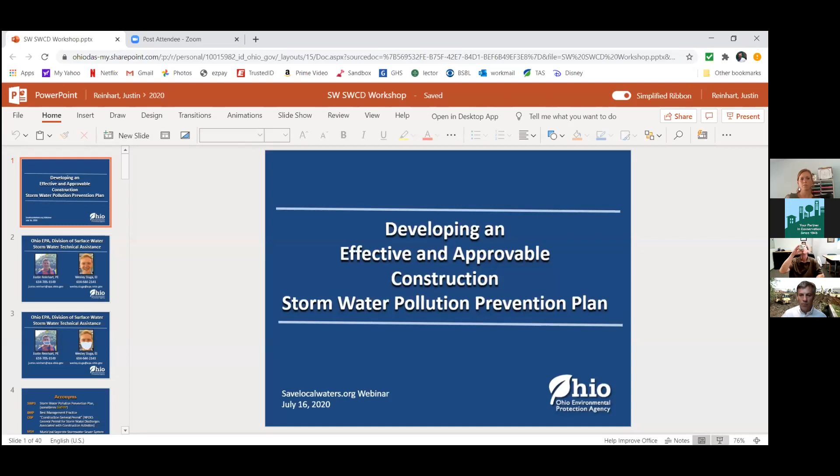Well, thank you again to Save Local Waters for hosting us today. It's unfortunate that we weren't able to proceed with the in-person workshop. I very much enjoy seeing and talking with folks in person, and especially on a regional basis, but I suppose the advantage here is that today we get to offer this statewide, and I see we had many partners register across the state. So thank you for accommodating the current times, and we'll see how this goes.

Also for setting the bar low, as our goal today will be to not have any glitches. Thank you, John. I think that gets Wes and I off to a good start. Anything we do and say from here on out is hopefully just icing on the cake. This is the first one I've done of these webinars since COVID-19, so hopefully it does go well.

But if there's questions or problems, please let me know. John, I believe you mentioned also that this was being recorded and may be available in the future. So here's Wes and I and our contact information, and you probably will more recognize us as this, or at least the foreseeable future, as we are currently working telecommuting as many of you are. So welcome from my basement.

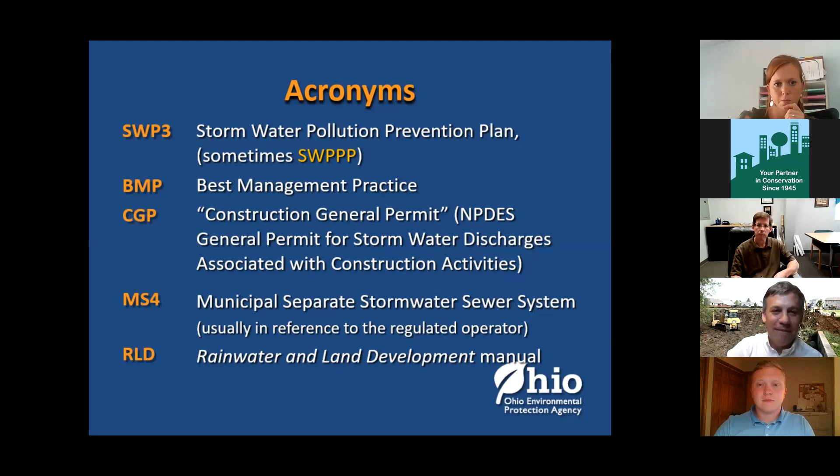Okay, so to start us off, thinking about a SWPPP and developing a SWPPP, and what is an effective SWPPP - and ultimately approvable is just the same as effective - I wanted to start by taking a step back and looking at how are we going to talk about that in an hour, hour and a half, more or less, in a simple webinar, when we have really a SWPPP document that's meant to be a very tailored, custom-built tool that is site specific for the project, and yet at the same time is something that is really incredibly diverse.

Just a few statistics I pulled out the other day, so these are current: we have almost 6,000 actively covered sites under the general permit, the construction general permit right now. Now, some of those may need to be terminated, but that gives you an idea of the amount of work. Much of that is covered under 623 MS4s in the state of Ohio, now pared down to just under 300 total permits, as many of those local MS4s are relatively small and grouped together.

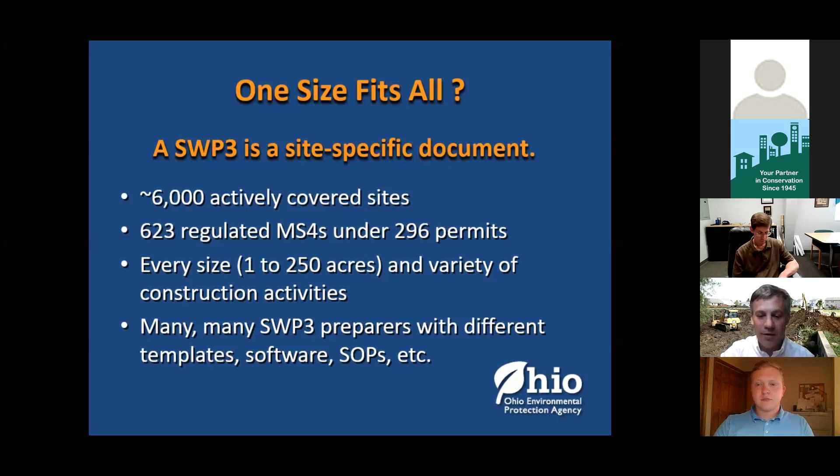So I guess that's a long-winded way of saying it's probably impossible for Wes and I to very simply, in an hour and a half, explain exactly what goes into a SWPPP when there could be so many different things, but we'll give our best shot.

So from the broad, I'm going to narrow way down in, and rather than go through line by line all the different requirements listed out in 70-something pages of the construction general permit, I really want to focus on one quote, one direct quote, one line of text, and that is, as a reference here, page 11: the SWPPP shall describe and ensure the implementation of best management practices.

Now that struck me as being awfully heavy when I started to think about 'ensure the implementation of best management practices.' It's quite a responsibility that we're stating a SWPPP is to do, and I try to come up with an analogy to this. Maybe this isn't relevant to some of the audience, but I thought back to Joe Namath and Super Bowl III of all things, and that was the original guaranteed victory.

And it's like, whoa, I mean, can we do that? Are we asking that we guarantee victory through a SWPPP? And I don't know if that's necessarily the case, that we're saying there shall not be problems.

But ultimately what we're saying, I think, is the SWPPP is a complete game plan, a war plan. Certainly Broadway Joe wouldn't have said that famous guarantee if he hadn't been confident that they'd addressed all the different elements of the game, and really felt bold and maybe even knew something that others didn't about their game plan. And really, that's what the SWPPP is.

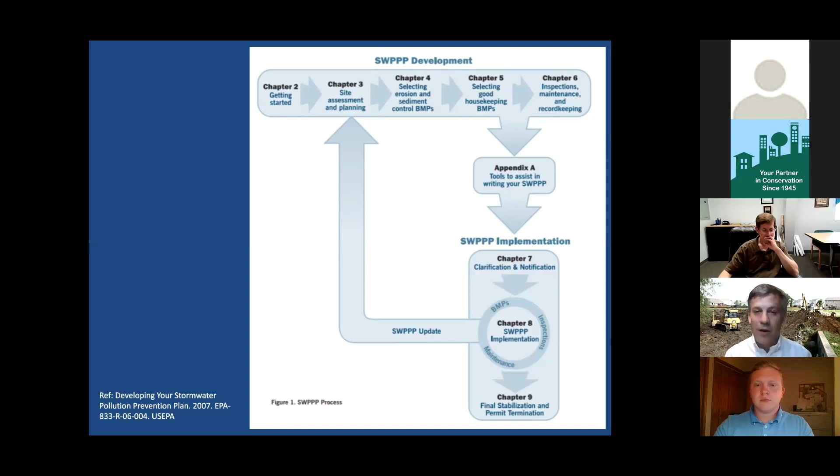It's maintained on site throughout the course of construction. It's modified, it's adjusted and adapted as such. And we recognize that those things are going to happen. Everything isn't completely predictable.

To an extent, the reality is that on most projects, from my point of view and experience, that process really is somewhat short-circuited. There's very little processing through the entire development process. It's hard to avoid, in engaging, implementing, and finalizing a SWPPP. Once the SWPPP is complete, construction starts. That update scenario tends to just revert back right into the implementation phase, and it's understood that it happens as part of the nature of projects today - that essentially the original designers are often not necessarily brought in once permits are obtained, plans are signed off on, and construction is green-lighted.

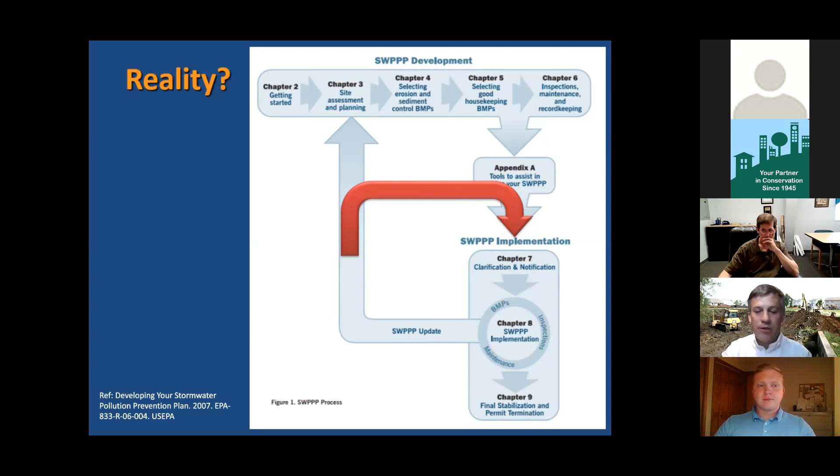Again, not to cast blame or point fingers, because these things happen, but it just highlights the process that really isn't much of a process - that we really have to have things done well and done right the first time, because these scenarios happen. Not to say that we could or should have foreseen this, but at least provide mechanisms to hopefully better address, prevent, and maybe even at times correct those types of problems.

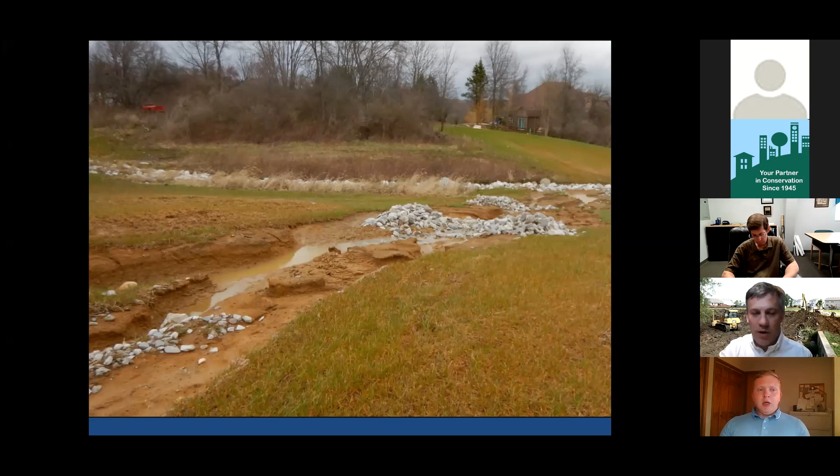So, to keep this first bit a little big picture, our mindset going into the development of the permit is oftentimes, and justifiably so, looking at the permit and saying: what does the SWPPP, or what does the permit require of the SWPPP? What am I required to have done? What is the minimum, and what does it say to do? And I'll do that, which is okay.

That certainly gets us what is needed, but I think to really be an effective and ultimately approvable SWPPP, we need to step back from that and look at our site and the conditions that could occur throughout that process, and determine what are the elements needed to prevent those problems or fix them if they arise. I know it's hard to do this without being too preachy, but it's important to recognize that just working through what you have to do probably doesn't get us ultimately to where we want to be.

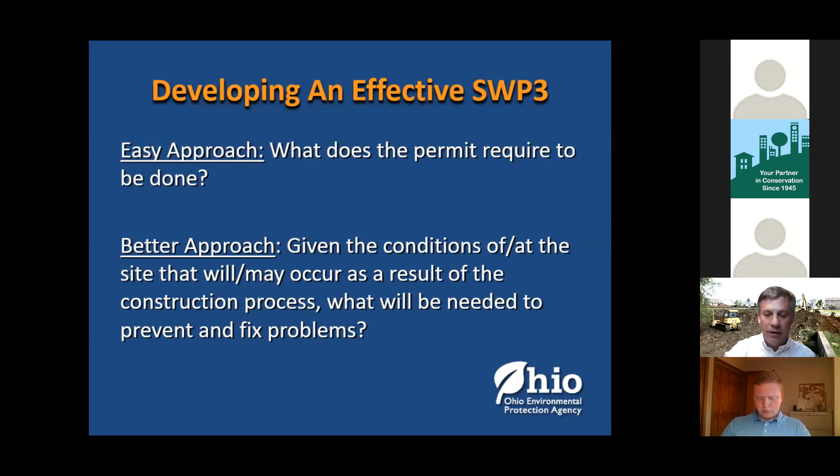Another element that is often challenging for all of us is that, especially as an engineer, our focus tends to be on ultimately the bread and butter - the permanent infrastructure that's going in. That's the fun stuff - whether your specialty is in piping, utilities, pavement, structures, grading, balances, and all the other elements of developing a project, or something more elaborate like airport construction or wastewater treatment plant construction.

The focus is always on the permanent infrastructure and the end result, whereas the SWPPP is such a different animal from the construction plans. It's really focused on the construction process and providing tools - not necessarily permanent, but temporary and usable tools - to guide the operators through that construction process and ultimately get to that permanent infrastructure. A lot of times what really gets weird is when we start to mesh those two things into one document. It's not that that's not doable.

I think it's just important as we go into it to make sure our mindset is that the SWPPP components are really a process-oriented element, whereas much of the rest of our work is really focused on that permanent infrastructure.

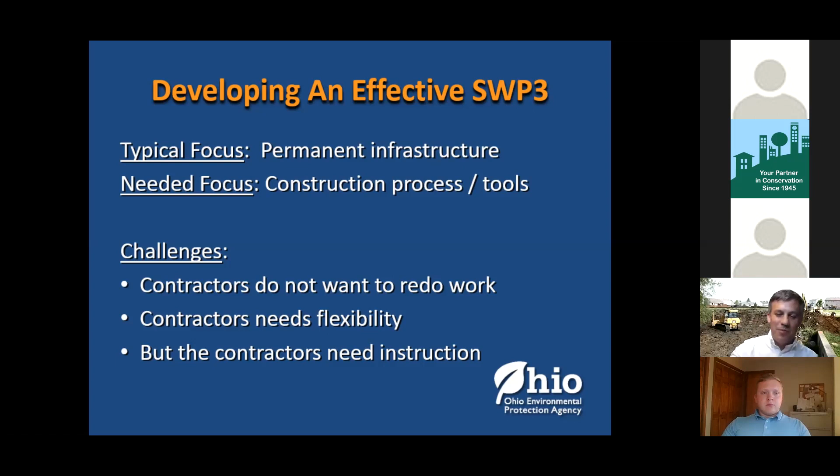But that doesn't necessarily excuse us from providing instruction, because ultimately the contractors and operators are looking for instruction on how to do the things that they need to do. So how do we wrap all of that into this strange, interesting animal of a SWPPP?

Ultimately, whatever we're doing as far as the project goes, it's a simple process, really, and I don't want to belittle it, but I also don't want to belabor the details. It's looking at the site, looking at the project from beginning to end, and assessing the project vulnerabilities from a pollutant standpoint, heavily focused on the sediment loading side of things. Some of those common vulnerabilities I've listed here, and then applying the proper BMPs.

So those BMPs are in some cases required, very specifically, through regulatory documents including the construction general permit. Sometimes the site might necessitate things be done a certain way. There's also an element of BMPs that are more like a tool box that can be employed as needed or as conditions arise. That's an important element of a SWPPP, I believe.

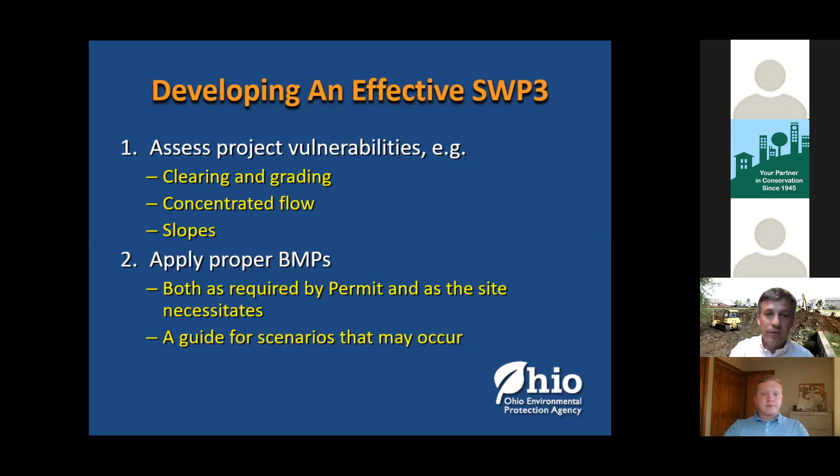So if I take those two steps and really start with looking at the vulnerabilities I mentioned - I was reviewing a study, probably dated, I don't remember the date, but probably 10 or 15 years old now, that looked at a small site, and the numbers are astronomical. The amount of TSS, or total suspended solids, in runoff over a small construction site, based on event mean concentration, were 150 times what they were before and after construction during active construction. I don't know, there's probably a lot of details, and that may just be one study, but it clearly shows an astronomical rise in sediment export.

And really the demarcating factor there is vegetation - the clearing and establishment of vegetation - as far as what is construction and what is not construction. Those are our bookends. So it's important to recognize that we need to think of these controls right from the get-go.

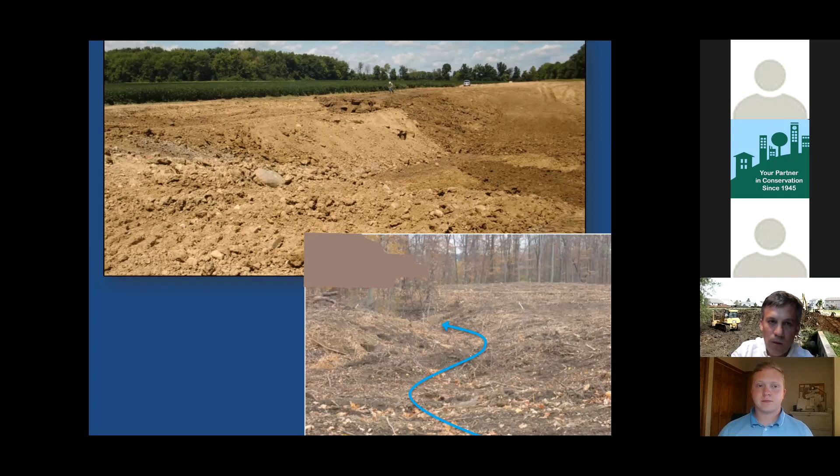Another high vulnerability spot: concentrated flow. This is one of the reasons a lot of the requirements in the permit are, to me, a forced thought process - the contours requirement for existing and proposed contours, especially the existing. It's useful to the designers in looking at how the site is eventually going to be laid out, and the cuts and fills that are going to be necessary to make the most conducive layout for drainage and other reasons.

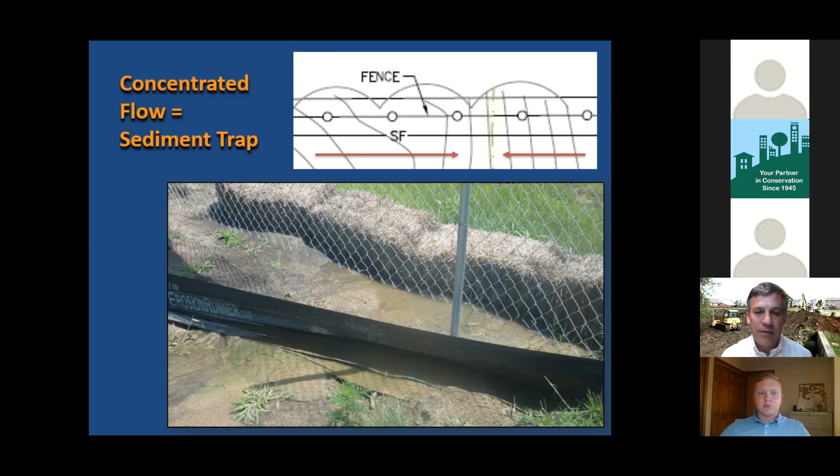Speaking of that, concentrated flow areas are again a high vulnerability place where we're going to see probably a lot of erosive soil movement, as in this channel that's constructed here, and it's very difficult at this point to remedy. We've lost topsoil for seeding, and we've got gullies now that will need to be either filled, and now we're moving water on fill.

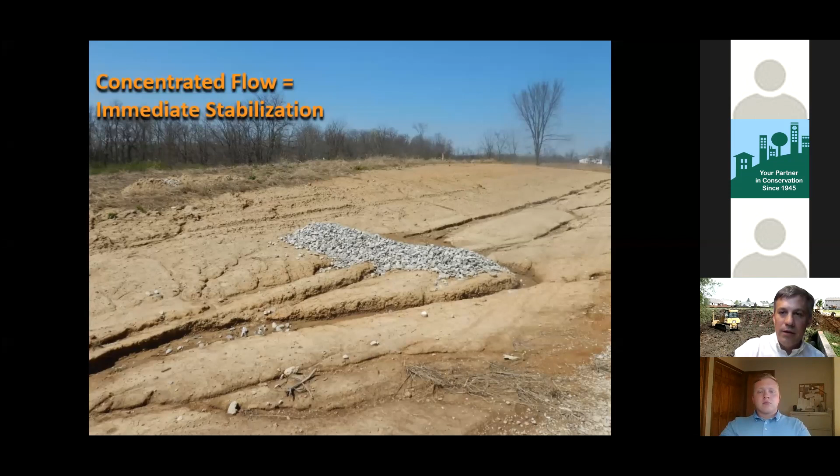We've got a little bit better structure here in place and a rock check to attempt to now slow or stop that erosive gullying, but at this point it's probably too little too late. Maybe a scenario where we would have had immediate stabilization, mulching, seeding, matting as necessary, rock checks as necessary, would probably have done a real good job at preventing that gullying from happening in the first place.

So those are areas of high vulnerability where we want to probably focus a lot of attention with concentrated flow areas, whether they're existing or created areas.

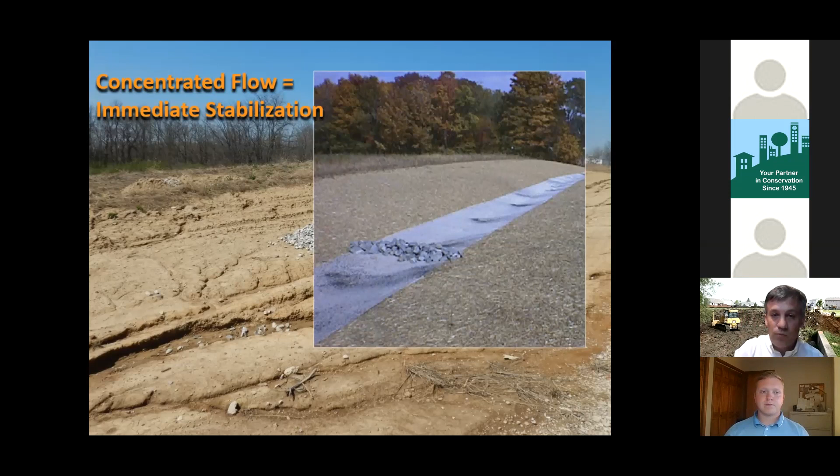Oftentimes, if we haven't specified something as a necessity to be placed or an option to be placed, these are the type of tools that we're going to have to pull out of thin air, or a contractor may pull out of thin air when he's told to by my counterparts more in the regulatory elements to fix something or change something, and the toolbox is bare. So we don't want to leave them with the toolbox being bare.

I mean, some of these scenarios aren't foreseeable, but again, we want to make sure that we address all the possible situations with the proper BMPs.

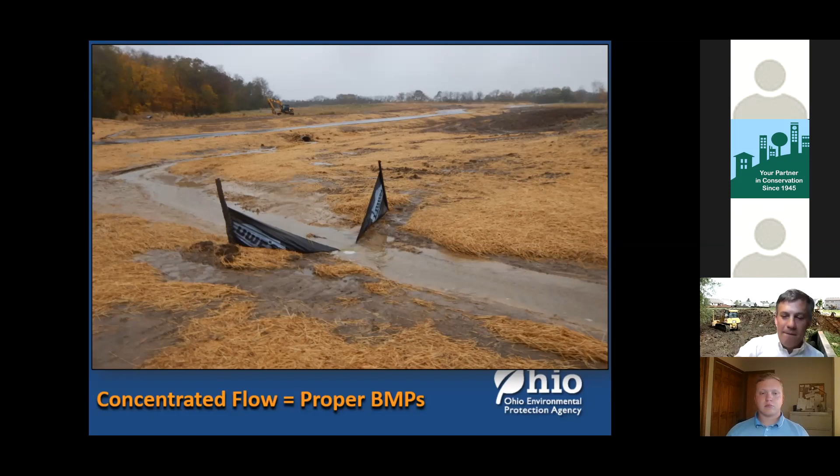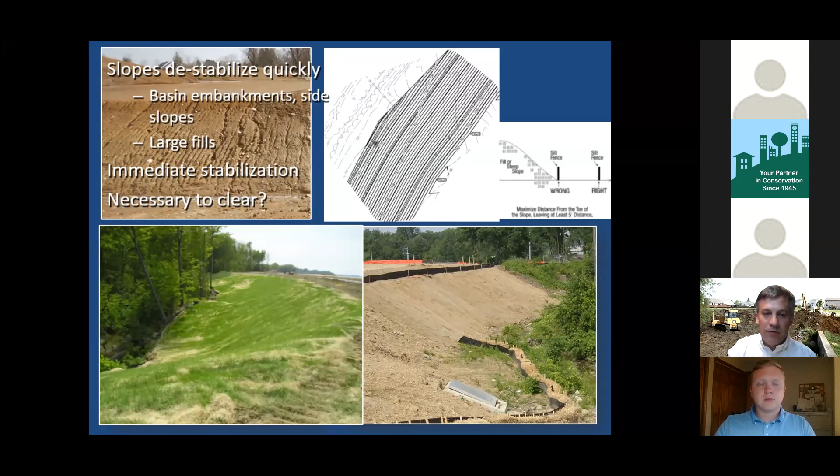And I like the picture on top. I showed you half of it earlier, but you can see now the other half.

So again, anecdotally showing that evidence of timing is really of the essence when it comes to problem solving and prevention. Timing seasonally is oftentimes hard to predict, and somewhat contrary to thought, a lot of the erosion ends up occurring more during the summer season when things are dry, like in that above picture. Yet you have severe gullying going on because you have periods of large, intense thunderstorms—lots of water coming down hard, very impactful, and lots at once on now relatively disturbed soils.

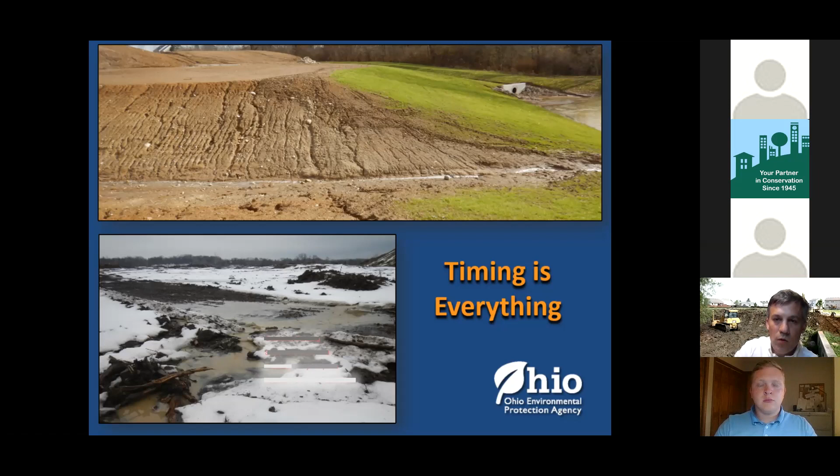And with that, the timing, I think, leads into the schedule. I kind of lied when I said there'd only be one quote or excerpt from the permit. As I went through this, I found it might be worth pulling up the exact wording there on the SWPPP list as far as our schedule goes.

But it requests an implementation schedule be included with the SWPPP, which describes the sequence of the construction operations and the implementation of the BMPs that go along with those.

And that's easy to do, and I think most people preparing a SWPPP are doing just that, in various forms putting together a construction schedule to the best of their abilities, understanding that many items here are either out of the SWPPP designer's control or unknown at the time the SWPPP is being developed. That's certainly understandable.

But it's also a manageable expectation, in that we have to also not get too caught up in the concept of construction schedules. I used to do a lot of construction schedules early in my career working for a contractor, submitting those with bid packages, and I've seen some immensely impressive schedules lining the walls of construction trailers like wallpaper.

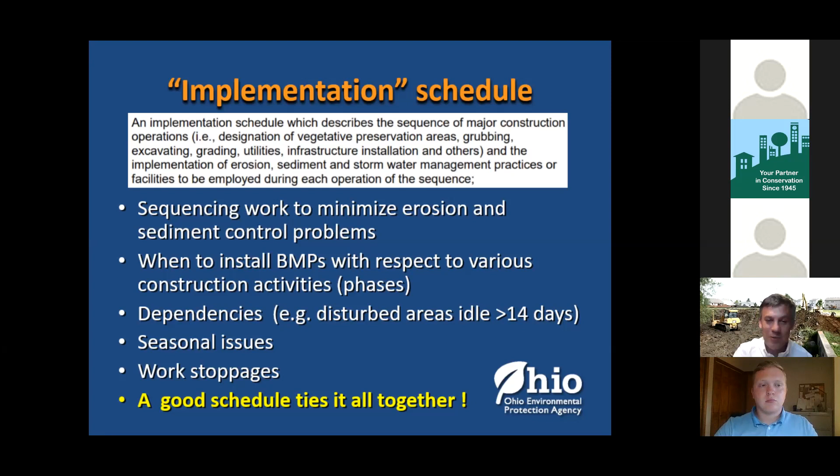So I kind of took a stab at looking at an implementation schedule—not that you should use this as an example, or think 'oh, Justin said do this, so I'm going to do it exactly this way,' but more so to get the wheels turning on things. And of course, the first thing we said is the schedule needs to really look at different operations and the sequence of those, realizing that at this point in time we may not be able to establish a specific time frame, but let's at least try to categorize those operations.

What order are they going to be in? They're generally pretty basic, and lay out a little bit of expectations of what are reasonable time frames, so that we can start to see how this whole thing is going to piece together. This isn't as important from a construction standpoint as it is for building the SWPPP—what are these pieces and where are they going to go? Really, almost the first step in building the SWPPP is getting us thinking sequentially and chronologically.

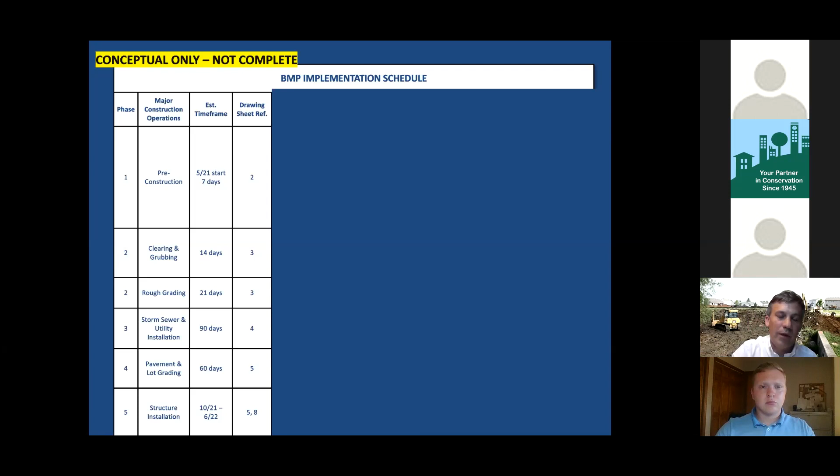I added this in there as a sort of cross-reference, like how do we then build our SWPPP according to this sequence or chronology? Do we tie the actual physical components of the work shown mostly in drawings, sometimes our specifications, to that exact sequence? Do we have that lined up? Or do we just have one pre and post construction type of plan set up, which is understandable, because that's probably from our permanency focus of what do I have now, what I might have at the end. But maybe we can work to bring in a more detailed chronology here, looking at these phases as they're probably going to occur throughout construction.

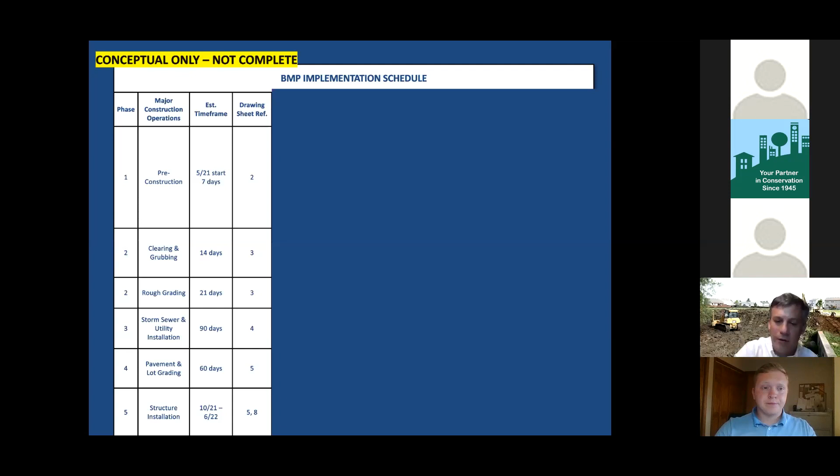And then lining up the plan, be it narrative, description of what to do, exactly when to do it, listing the BMPs that are going to be used. The schedule is only going to provide us the list and the timing, and the location will be indicated on our plans, but we can break that down and even provide a contingency scenario. These are other things that might be necessary throughout this phase that may or may not be included in the plans, but are part of that whole toolbox provided via the SWPPP.

So again, I didn't get this completed in time, but I thought it was enough and worth showing at least as a concept. So that's hence my little caveat up there.

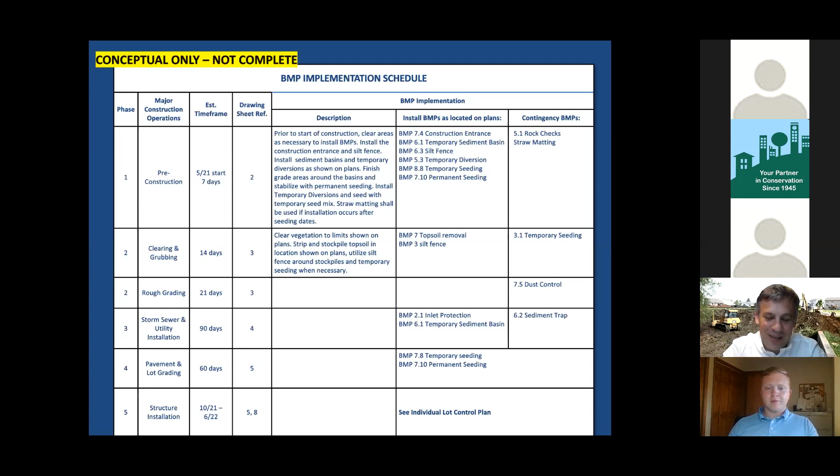Going back to tying that to the drawing, so now we've got drawings that are really thinking sequentially and chronologically. For pre-construction, most people are doing existing conditions, but let's take that to what's existing, what's beyond existing, to what's construction day 0, day 1, when we're implementing those initial practices, emphasizing that those go in before the rest of the work is done.

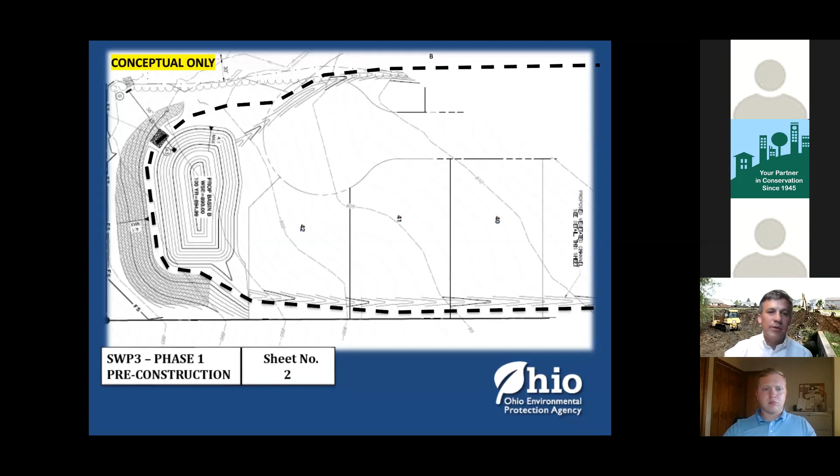So I've got my basin shown in here, and diversions to that basin, and some silt fence down to the left, and maybe a few items like the dotted line I added in as a drainage area to help SWPPP reviewers understand what's being collected in that particular basin and identify how that matches up with the other parts of the SWPPP.

I've got my table showing all the different various requirements to the basin and checking that with various tools provided to show the reviewer that all of this lines up and matches per the design requirements and per my intended outcomes here.

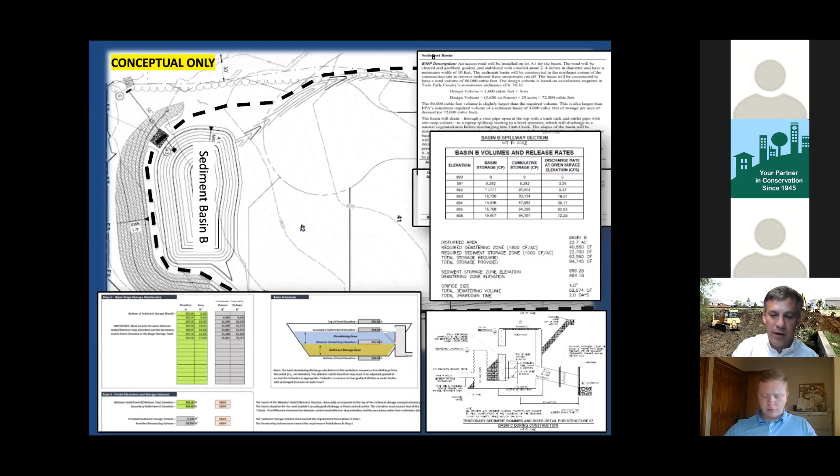But then I look beyond that and say, okay, especially when I start thinking timing wise, I've got the basin in, and most everyone is pretty up to speed on basins. But let's look at the next steps. When the basin's constructed, can I also then go ahead and seed those areas?

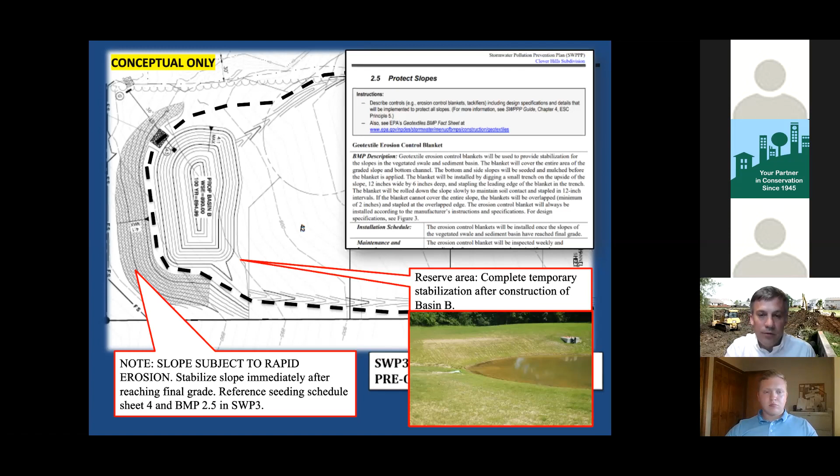I've got a slope created by an embankment constructed to the left. I've got an area where the whole basin is in reserve, so that work shouldn't need to be touched later through home construction. Can I get that whole area stabilized up front before a lot of the other work occurs? Those are things we can call out in a plan, noting, hey, this is a pretty vulnerable area, it's very important that we get this stabilized up front, and these are the tools, the BMPs, that we have to use to do that.

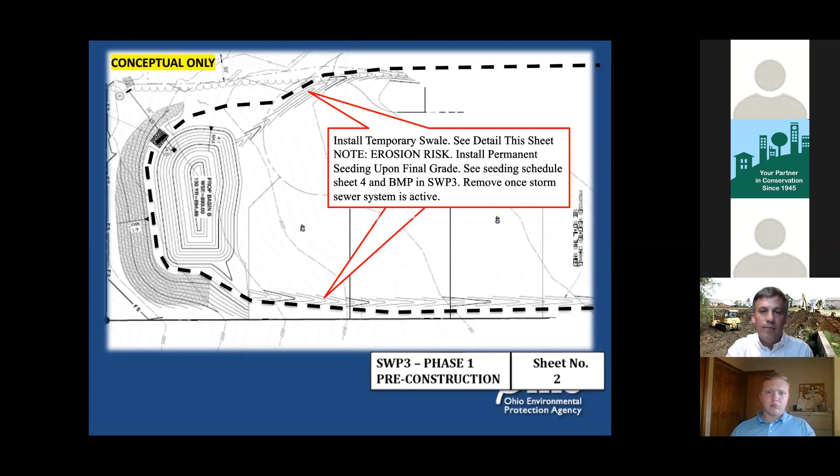Swales, again, show kind of a timing scenario, like how are these going to go in, when, are they going to be removed, when are they going to be removed throughout the process.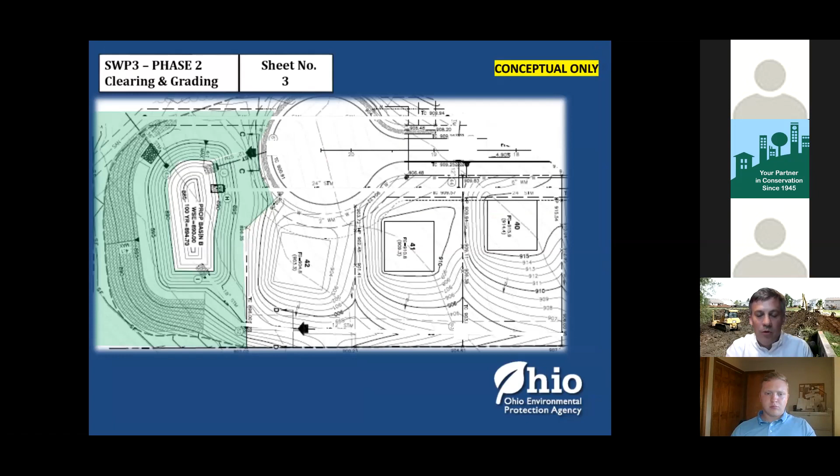I move to my next step. Now I've got really clearing and grading happening. I've got the rest of the site being removed and brush being removed, some mass grading probably starting. These are areas where now we can start to see water move differently. I've rough cut my roadway, and I've got a culvert down at the bottom of the hill. That roadway immediately turns into basically a riverbed and concentrated flow.

If I'm not careful and prepared, if my timing is not right, I might need to utilize additional tools to prevent problems from happening, like this sort of gully erosion that happened at the end of this culvert going down into the basin in a very similar scenario.

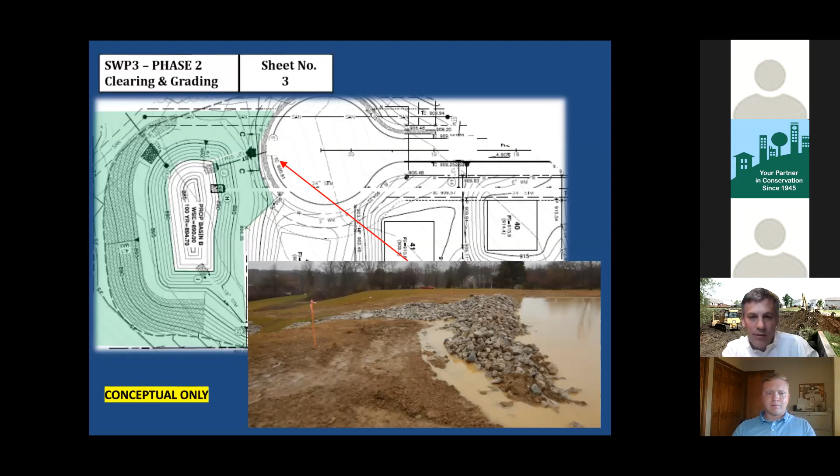Maybe I've got to put sediment traps. The grading is inadvertently acting as a sediment trap in this scenario. Maybe I utilize other tools during this phase where now I've got the help of having a sewer system direct water, but now I've got that water in runoff coming to me in a much different and much more concentrated manner.

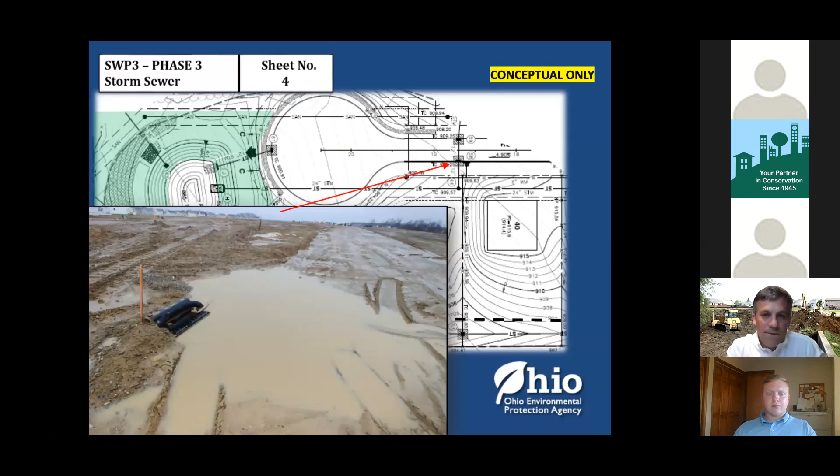Areas below here now, how do I make this work where I had a diversion going into storm sewer and a drainage swale? Making sure we're indicating in our plan how that's all going to fit. But most importantly, I think, is once I've got that area done, I've got the sewers in, I've got a swale in place, that's going to start moving water immediately.

Those areas shouldn't be subject to really probably any further construction on the actual lot site. So can we get those stabilized? Or if we're not, do we need to employ traps, again, like is almost inadvertently created here at this inlet?

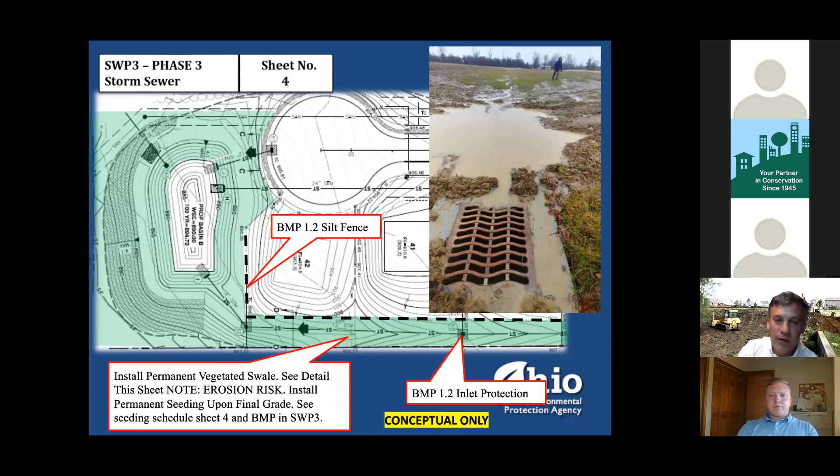Can we get those areas seeded, silt fence moved, so that we're really doing a sequencing and a phased type of project? And then I moved to eventually getting to the individual lots, and my individual lot plan is usually generalized, but I do want to call out that there may be scenarios where we need to make sure that we're very emphatic about certain things happening as individual lots get developed.

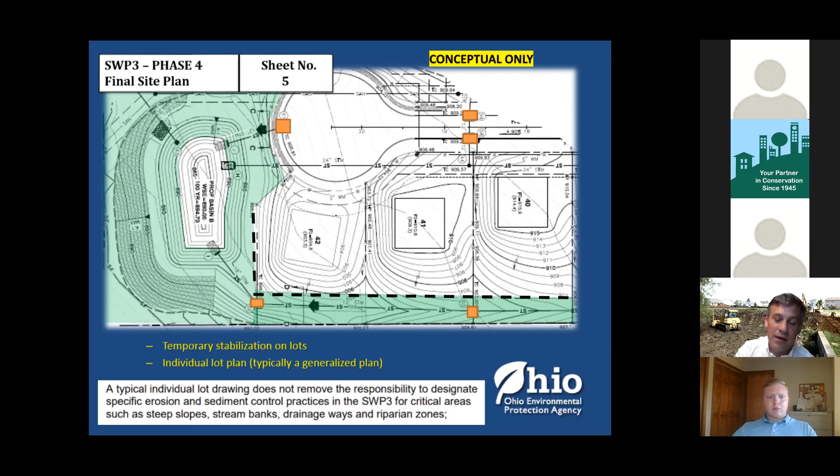And I'm using a residential site here as this example, but this clearly would apply to a lot of other sites, but I think hopefully you kind of see the concept I'm getting at here, which is this chronological thought of developing a SWP3 and then tying all these pieces together based on that chronology, not just in the plans, because the plans are very important. They're obviously what the contractors and operators are going to be focused on, but that they tie to the other components, the narratives and the design criteria and documentation.

And then long-term, what do I have going on? Temporary stabilization, we've got 2 different sites. The upper one, great, everything is done. It looks awesome. We're going into winter clearly, and we've got nothing. Can we emphasize that these areas are finished and can be stabilized?

And then on the bottom, you can maybe see a little bit of grass, and great, they actually did that. And, well, things happen. Of course, that became the roadway to all the next door neighbor home construction projects. And that happens, and we can't control that, but we can at least get a good start by not getting us to the upper situation and making sure that we get that temporary stabilization in.

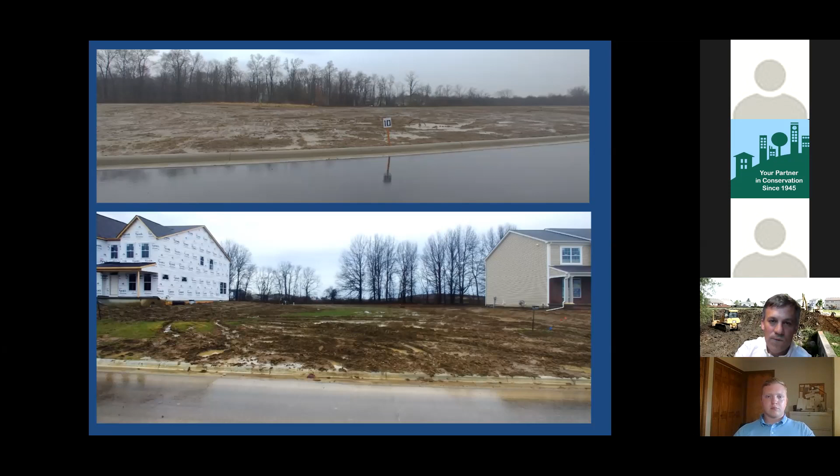Post-construction, that was a heavy load of sediment control. I think when we look at the post-construction elements of the SWP3, the most important thing I want to probably hone in on is how much focus is on the peak control elements and the movement of water, but really the post-construction design is so different in that we look at the water quality volume.

It is that 0.9 inches is looking at the annual average, the long-term and a complete volume of water. So you can see in those 2 charts, it's that whole knee of the curve discussion.

We're collecting the vast majority of water in that 0.9 inch event. It's not correlated to an actual event. It's simply a statistical value looking long-term at how are we getting 90% of that runoff collected so that we can treat it.

Because of that, a lot of misconceptions occur based on our traditional just quantity of water and outlet control thinking, that we really don't have a bigger is better scenario. If I move that 0.9 to 1 inch, I really don't collect much water, as you can see on the lower chart. So you really can't overcompensate, and it doesn't become an apples to apples type of calculation.

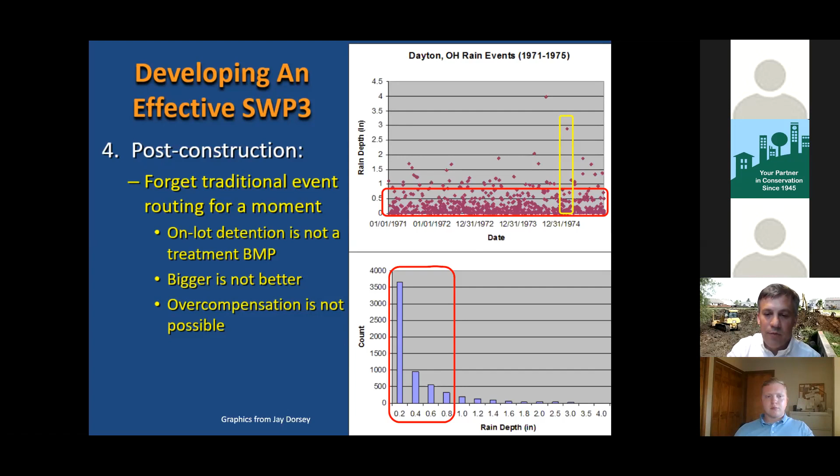And lastly, demonstrate compliance. Wesley and I are trying to provide a lot of the tools to help with that, both through the review process and the application process or the development process to show that the designs are meeting the various criteria. 2 of the spreadsheets that we have posted on our website.

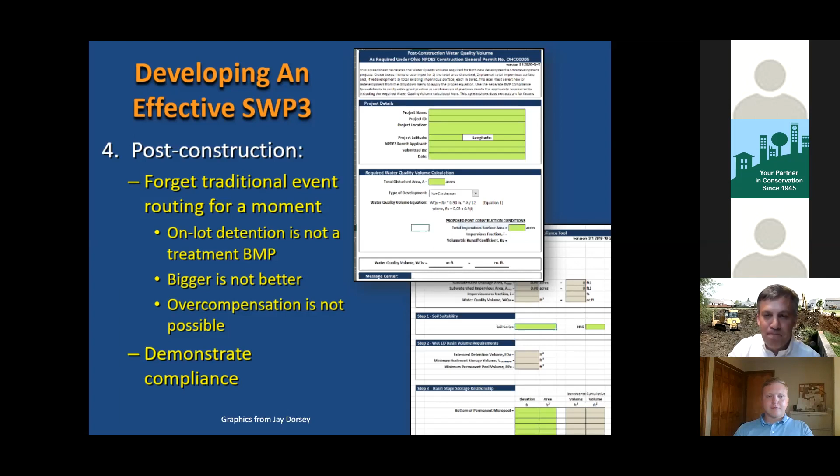Non-sediment controls, again, I don't want to mention too much about these, but I also don't want to skip over them. They're very important, and some of these, like the ones on top, can be very significant depending on the type of work going on. That's sort of a site-by-site scenario.

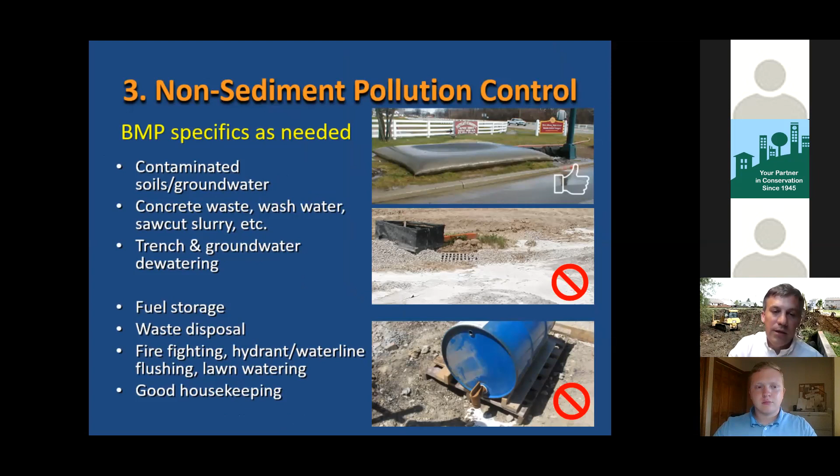The bottom ones are probably controls needed on almost every site, waste disposal for example. So are we indicating those on our plans? Wes will probably go into more detail on some of those things he's seeing with them.

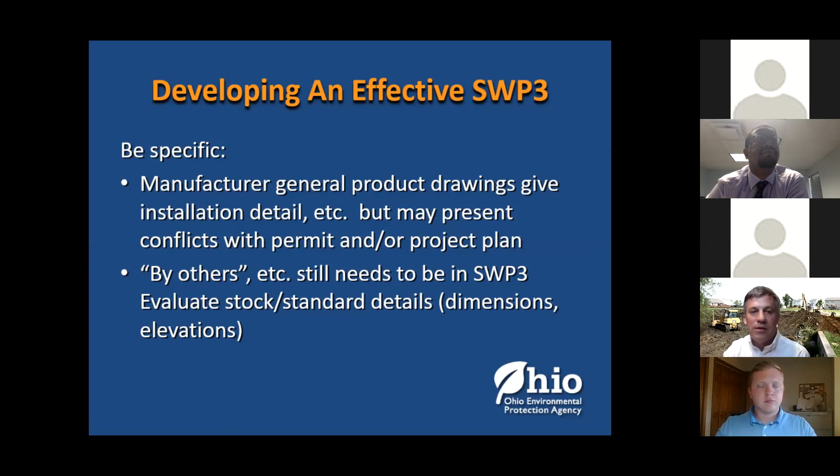I think other big picture topics and things I've seen - one is being specific, especially in today's day and age where we've got a lot of moving pieces on a set of plans. We've got various manufactured products going along with the SWPPP, things like skimmers, underground post-construction systems, making sure that those manufactured, produced, and provided details don't conflict with the actual installation plan. And although we may have elements done by others on a site, those need to still be incorporated by those others into a SWPPP. So a lot of times timing may come into play there, but we need to try and pull those things in.

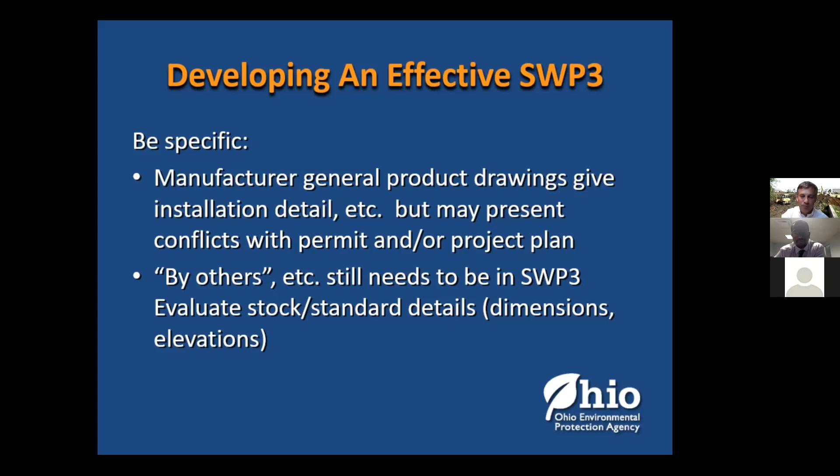You know, if it's geological reports or any other work being done - and then this was just my quick list of more detailed items I've seen that come up from time to time, somewhat frequently. The rainwater - we do not have a standard for straw bale or silt fence check dams, straw wattle, sediment barriers at this point.

Skimmer connections are very interesting, and any help to emphasize how those connections are to be made is very much appreciated.

In-stream BMPs aren't possible - we see that from time to time. Bypass undetained areas really need to be undisturbed or minimal pervious areas, and can't really be compensated for in other areas because of how that water quality volume works.

We've got the relatively new equation for redevelopment sites. Definitely, when we're under 2 acres, there's the ability to rationalize those post-construction controls and make sure we're explaining the thought process that's happening there.

And lastly, and most probably importantly of the whole thing, is just to contact us, any of us, if you're not sure, rather than moving forward. More than happy to help as much as we can, explain what Ohio EPA expects, and our thoughts on how you might be able to address things.

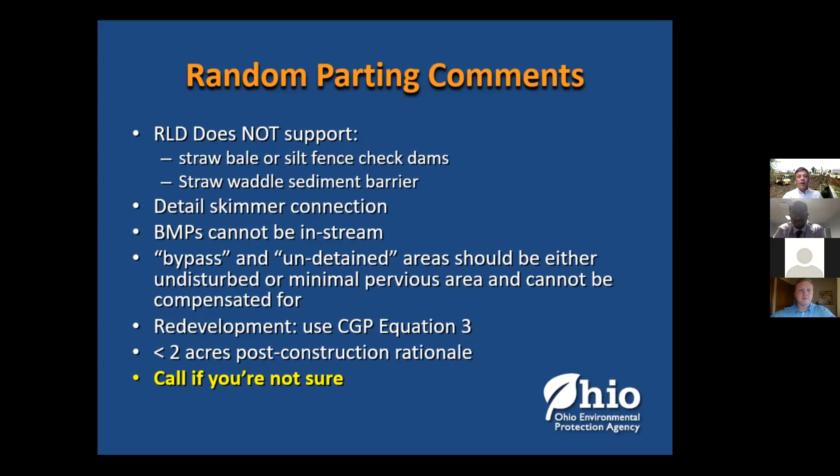And that's all I have. John? Yeah, Justin, no, that sounds great.

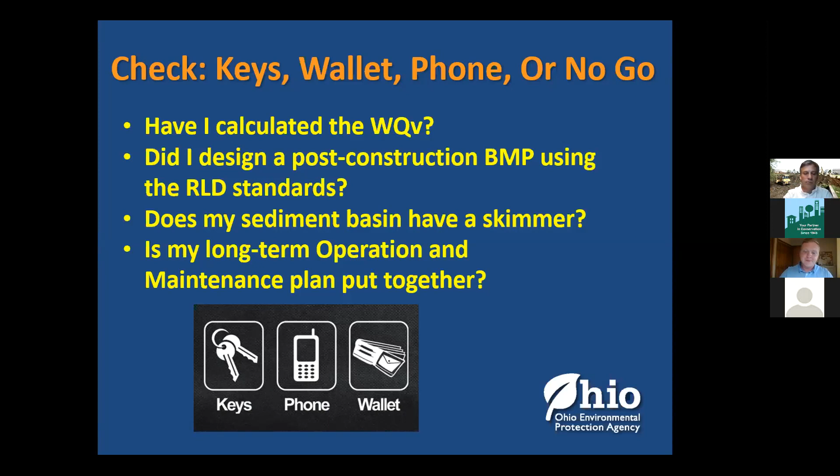As Justin also mentioned, the SWP3 represents a detailed thought process. It shows critical thinking and involves site-specific design. A review checks that process, but disorganization can make it difficult. Every firm has a different SWP3 template, and that can cause a reviewer a lot of headaches. So it's important to make the important information visible, using summary tables or clear organizational patterns, and then grouping of information. That makes it a lot easier to check that you have everything you need.

The problem is that reviews can be a little like a word search, with reviewers hunting and circling important information as they look through your SWP3. This problem is compounded when a SWP3 is incredibly long. Rarely do SWP3s need to be longer than a few hundred pages at most, but sometimes reviewers see submissions that include things like the entirety of the rainwater and land development manual, which by itself is more than 400 pages.

Now to get into stuff Justin brought up, I'm going to talk about important issues and common oversights. After working with reviewers and doing some reviews myself, I've compiled this big list of common issues regarding SWP3s. Some topics are pretty important, and I'll take time to get into the details, while others I'm just going to touch upon. Feel free to note any questions and we can discuss them after.

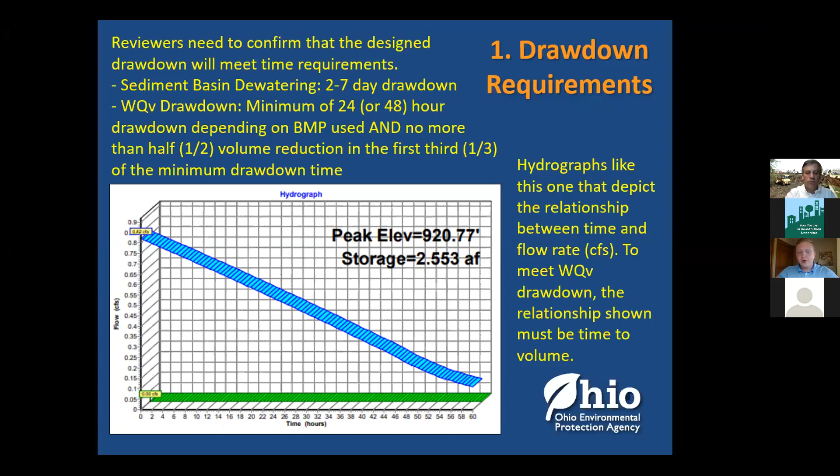As you can see, it checks both the minimum, that 48 hours for this case for the dry basin, and that no more than half is drawing out in that first third of the 16 hours for the dry basin.

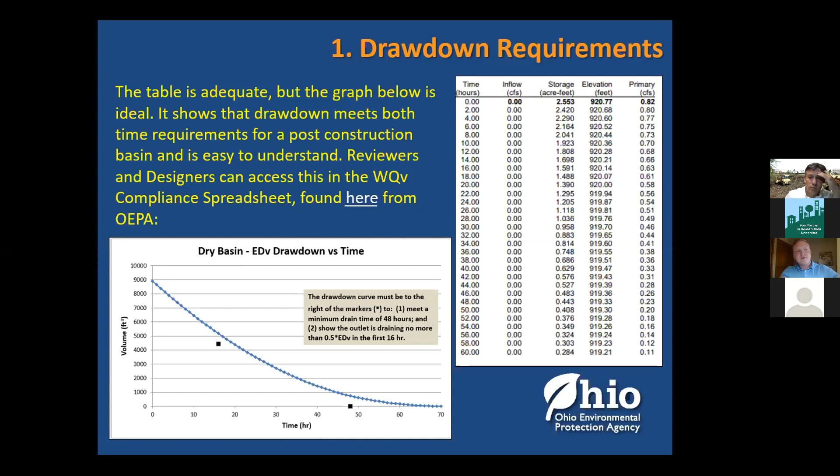A smaller topic is the missing logs. So we often note that logs are missing.

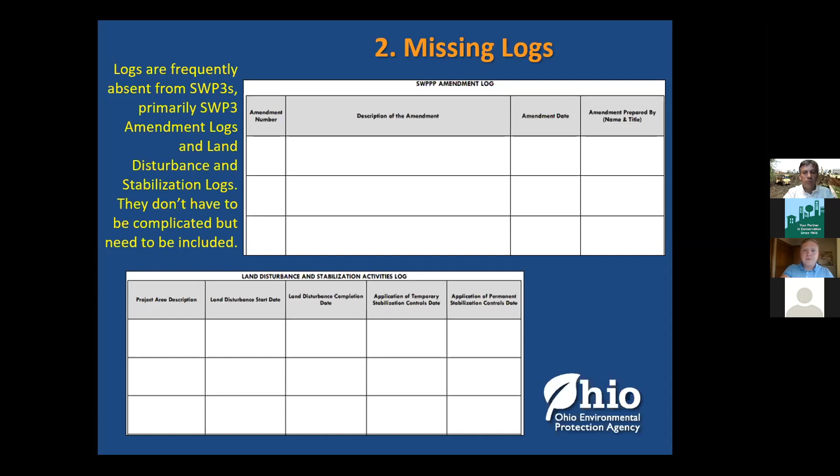Our next big important topic is operation and maintenance plan. So improper or incomplete long-term post-construction operation maintenance plans, a little bit of a mouthful there, are one of the most common noted plan deficiencies in reviews.

In fact, in reviewing plans for protected watersheds, like the Darby and the Olentangy, just in 2020, more than 50% of initial SWPPP submissions are missing a complete operation and maintenance plan.

The O&M plan is incredibly important as it ensures that the post-construction BMPs will be maintained and function in the future. When creating your plan, it's important that this plan should be a standalone document, meaning it can be handed off to the responsible party as a small packet and doesn't rely on key information from the SWPPP to be understood. Typically, when assembling your SWPPP submittal package, we like to see it added as an appendix, and that's encouraged and acceptable.

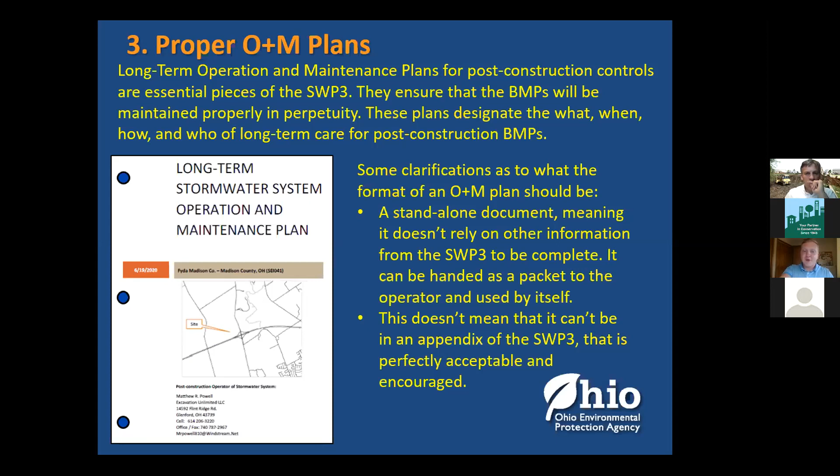So to continue there, as to what should be included within an operation and maintenance plan, you need to first specify the responsible party who will conduct inspections and perform or contract out the maintenance tasks. The inspection process and maintenance tasks must be detailed, as well as the timeline for both.

Sometimes an operation maintenance plan or a site requires legal agreements or easements, and the O&M plan should include those if they're applicable. Drawings, details, and explanations are crucial to the continued understanding and proper execution.

This is because the party who conducts inspections may be different from the party who performs the maintenance, and both of them may have varying levels of stormwater experience. So maps and directions and explanations are always helpful, maps especially, because it helps prevent trespassing, and so you're going to want to explain to a party how they could access the site and traverse to the BMP without getting into any trouble.

And the bottom line really is that the better an O&M plan is, the more likely that the BMP will function properly and fewer headaches will develop for the site occupant and the responsible party in the future.

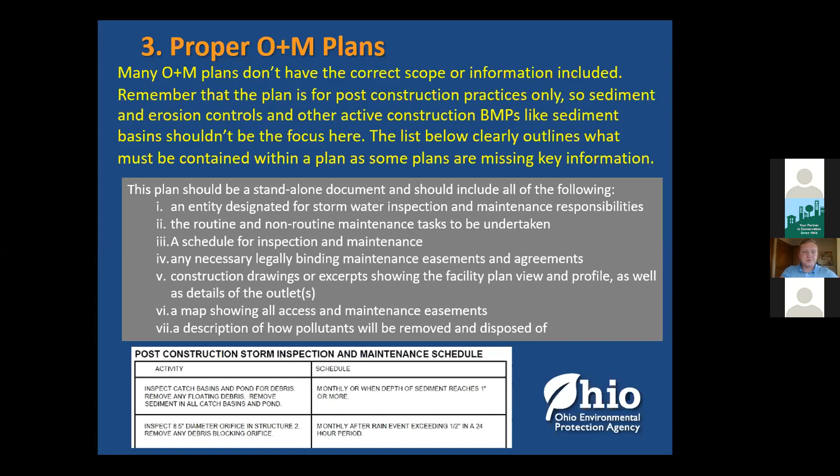On to inspection checklists. These checklists make sure that important BMPs are in place and being used properly. They make sure that the contractors on site are helping to protect water quality and are following the SWPPP.

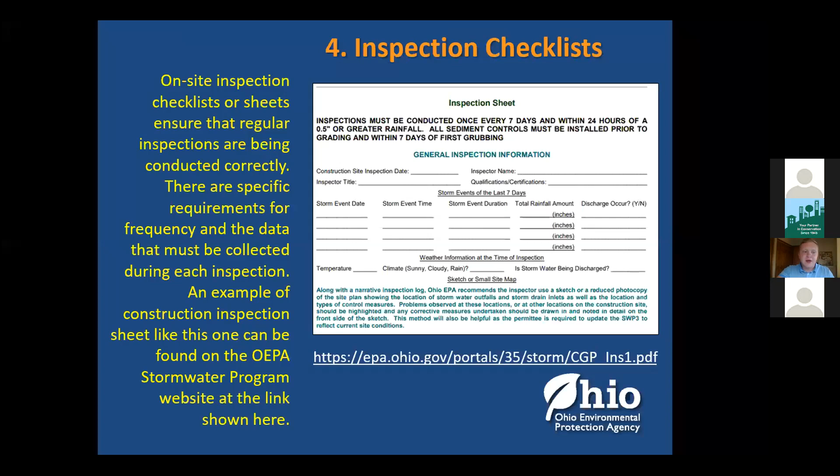All right, another big topic, the stormwater management report versus the SWIP. What is included in one and what is included in the other?

Mainly, the stormwater management report contains post-construction controls and water quality volume, or at least those are the things that we often see in a stormwater management report that need to be in the SWPPP. When that kind of information is separated into the stormwater management report, it ends up delaying the review process.

When important information is missing from the SWPPP, the initial review goes through and notes deficiencies, and a comment letter is sent out. Then we realize most of that information was contained within the stormwater management report. We send that along, and another review is conducted, and that can occur in a cycle until all of the issues are corrected.

However, if that important information in the stormwater management report was duplicated in the first place, that's what we ask: it's up to the consultant to duplicate the important information and integrate it into the SWPPP, because the SWPPP should be a standalone document and doesn't need to reference other documents in order to be understood.

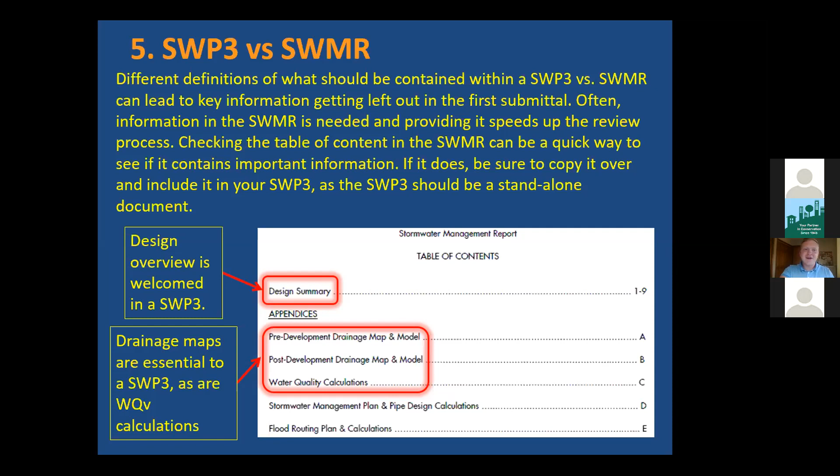All right, some smaller topics here with reverse flow outlets and sediment basin cleanout procedure. Designing BMPs with maintenance in mind is a real win for any site. BMPs are going to function better, they're going to function for longer, and eventual maintenance will be easier to conduct if the BMP is designed with that in mind. This is especially stressed in basin outlets.

On the sediment basin cleanout procedure side, sediment settling basins are primarily designed to let muddy water pool and the sediments settle out, as per the name. Eventually, clean out will need to occur as that sediment storage zone fills up over time. A clear procedure should be included to state when clean out should occur, and how you are going to measure when that clean out should occur.

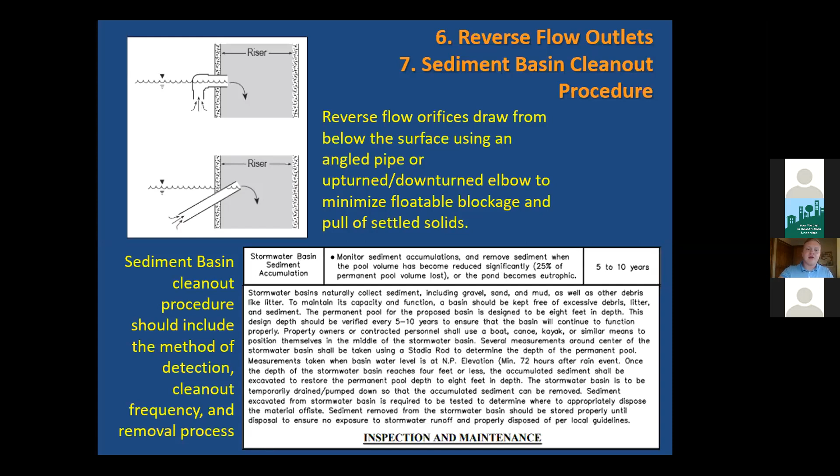So when it comes to our next big topic, explanations aid understanding, Justin talked about this a little bit, and how important it is to make the SWPPP understandable to everyone who looks at it. One of the main ways to do that is to include explanations.

So if your site is going to use a non-traditional practice of some kind, it's up to you as the consultant to put together an explanation that shows how that practice is going to be used, how it's going to be implemented, and how it meets the requirements of the permit to protect water quality.

So like Justin said, if you have some small or odd areas of a site, like distant corners or sloping sides on the edge of your site, it may seem almost impossible to collect runoff and route it to a basin using a traditional practice.

But it's still important to protect it from sediment, from erosion, and a loss of sediment. So it's up to you to figure out how we can implement something that will fix this, and that gives you some freedom to be creative and design something that works specifically for your site.

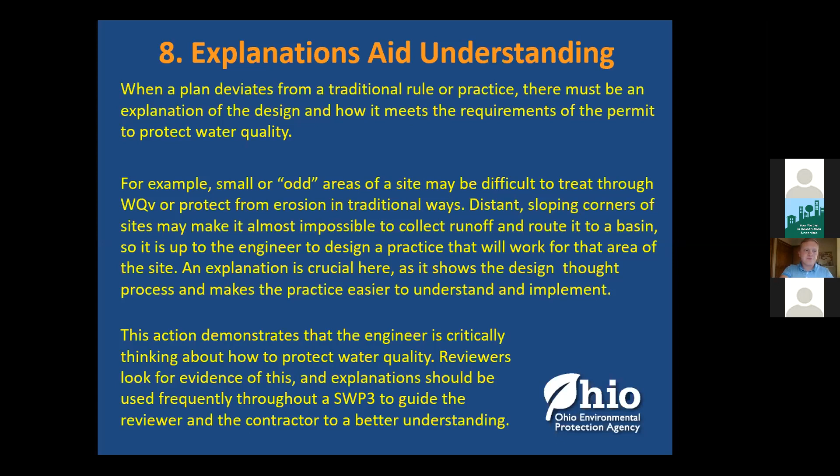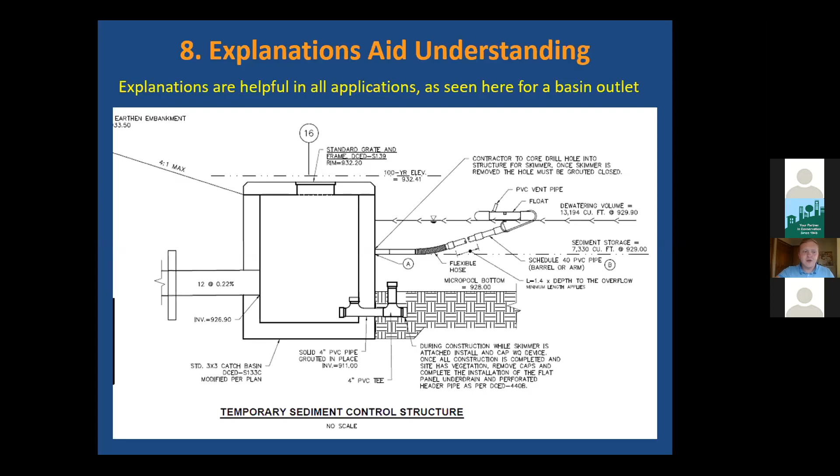So some other issues, typical individual lot. Justin talked about this a little bit in subdivisions. When you're working in a subdivision, we require a spec sheet that shows a typical individual lot and the associated sediment and erosion controls needed to manage erosion and sediment loss. This is a simple addition, but it's often overlooked in SWP3s, so be sure to double check that your SWP3 has one included when working on subdivision developments.

If your site is going to use a regional basin, it's important that you include the same information that would be required if you were implementing your own basin on your site. That includes the water quality calculations, the impervious area, the total contributing area, drainage maps, and especially a long-term operation and maintenance plan. The reviewer can thus ensure that the regional basin has accounted for your development and will properly function in the future.

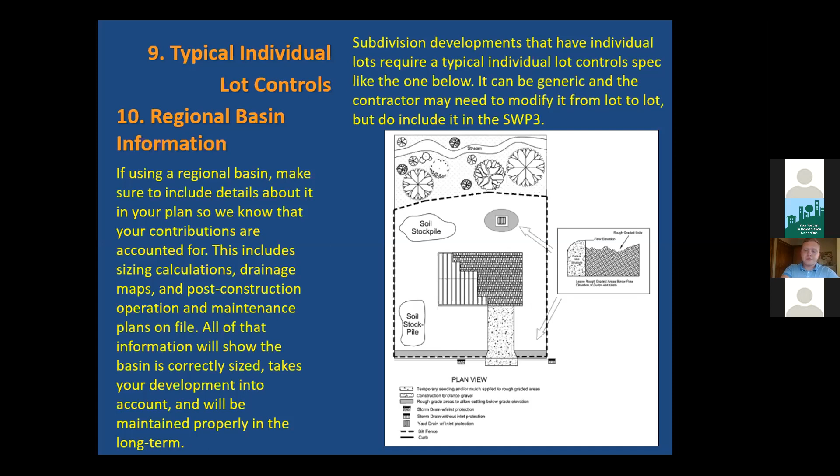Another big point that we note a lot in our reviews has to do with boilerplate language. A large portion of every SWP3 consists of boilerplate language copied from one project to the next, such as standard drawings or spill reporting procedures. This language periodically needs to be reviewed and updated to meet the newest requirements, so I've put together some of the more common places where boilerplate specs or language need to be updated.

For example, compost filter socks are an approved alternative to silt fence, kind of what Justin mentioned earlier about straw wattles. It has to be a compost filter sock, and one of the big parts of that is that they're at a 12-inch diameter minimum. What we typically see is that the diameter specification or the fill material specification is often absent, so that needs to be clarified within your boilerplate specs.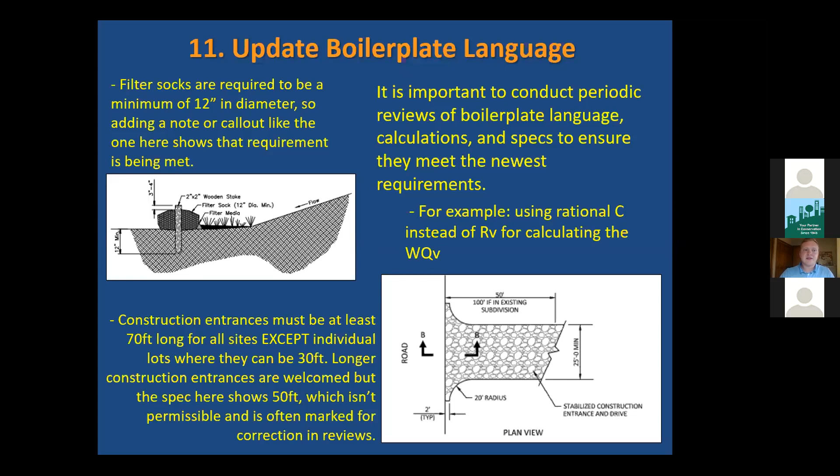For construction entrances in a similar vein, we require that they're a minimum of 70 feet long, or 30 feet if you're working on an individual lot within a subdivision. But like we see here, commonly the lengths are specified at 50 feet, so those just need to be updated.

Continuing on, if your SWPP doesn't have the most current boilerplate language, you're often going to see common comments like these calling out some of those deficiencies or missing information. For example, inspection reports need to be kept for 3 years after the notice of termination has been approved, and that's easily corrected by adding a simple note.

But oftentimes, procedures are not applicable to your site. As Justin mentioned before, you have to prepare the contractor a little bit, to give them that toolbox in case plans change. So you're going to want to provide some explanation on maybe hazardous material handling and waste disposal, clean hard fill, equipment fueling, spill reporting, or process wastewater. This can be an opportunity for you to better explain the scope of your project, or give the contractor a toolbox of directions in case plans are amended and the site changes in some way that would invoke the use of these.

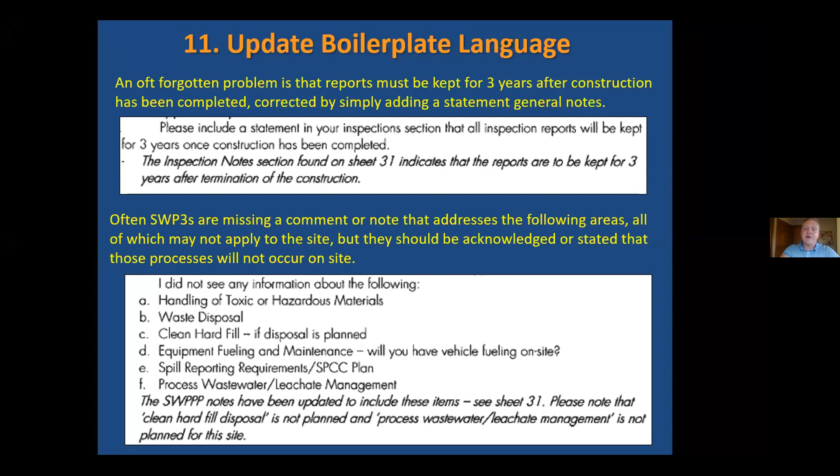Drainage maps are incredibly important. They show how water, and thus potentially pollutants, will navigate your site. Excellent drainage maps like this one are color-coded, labeled, and display important information about the contributing area, such as total area and the impervious fraction or impervious area.

Now, I will note that you need to make sure to include off-site drainage. Your site doesn't exist within a bubble, and runoff typically ignores property lines, it goes wherever the gradient forces it to. So drainage maps and this additional information help to double check that BMPs are appropriately sized and all your site area has been accounted for and is being treated.

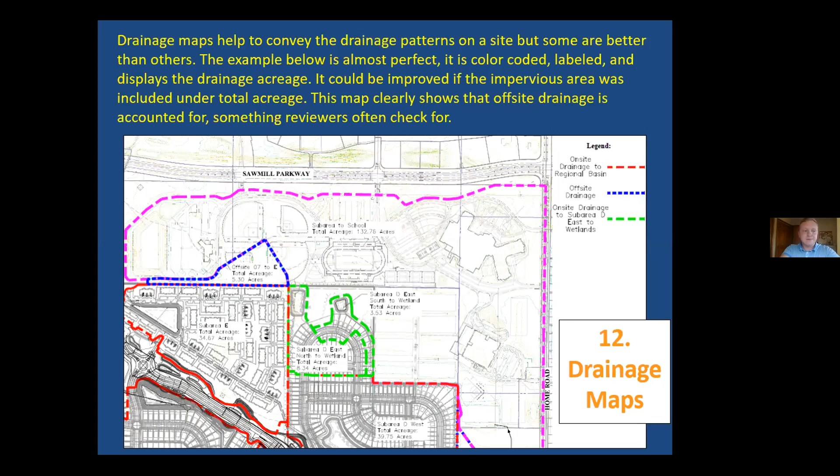Hydrologic soil groups and soil data. What I want to say here is that soil information should be used to support design and is not just a regurgitation of the soil report that's pulled.

Did you as the consulting engineer consider soil suitability when designing your site? For example, if your infiltration basin is located on type D hydrologic soils, then maybe soil suitability wasn't a big enough factor when designing your site, because those two don't coexist terribly well.

But be aware that pages and pages of soil report information doesn't necessarily show that you've incorporated the report into your design. Again, it's only going to bog down a SWPPP.

For example, the SWPPP I pulled here shows all the important soil information for this site condensed down into a single page. But just last week, I learned of a SWPPP review that had 64 pages of soil reports for a 2.5 acre development. It included the entire glossary from the Web Soil Survey, comprised of more than 40 pages of definitions, which doesn't really help the reviewer or the contractor.

So make sure that when you're making additions to your SWPPP, they're adding value and conveying important information, not just adding length.

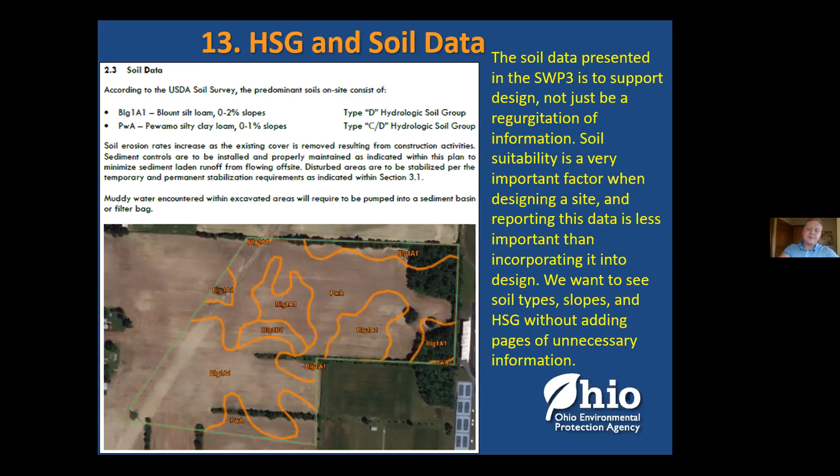Something that's been brought up a lot recently is proper skimmer sizing, and that correct skimmer sizing is integral to the proper function of a sediment basin, or else it can drain too quickly or too slowly. But we commonly see that it's miscalculated.

In Ohio, skimmer sizing is based on the required dewatering volume, not the provided dewatering volume of the basin. So for small basins, this difference can sometimes be inconsequential, but for enormous basins, the difference can be equally as enormous. So I put together a little example here that highlights why this distinction is so important.

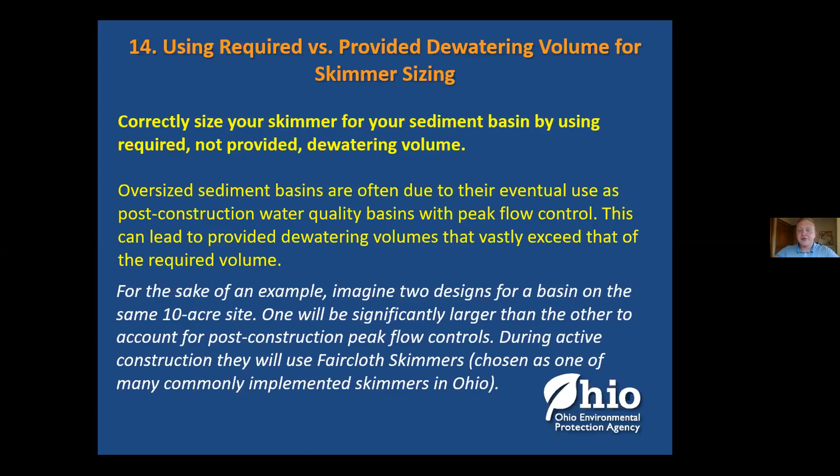We're going to imagine a 10-acre site, and there are 2 potential designs of a basin that could be used to treat and collect the runoff from this 10-acre site. Just for the sake of the example, no endorsement, but we'll say they're going to use a Faircloth skimmer. As you can see, the two basin designs both treat the same 10-acre drainage area, which means, as I said, in Ohio, the requirement for dewatering volume is based exclusively on contributing area.

However, the volume in Basin B is 3 times the size of the volume in Basin A. And that could be because perhaps the second design took into account large peak flow controls for post-construction and planned to make the basin big in the first place, instead of expanding a small sediment basin into a large post-construction basin later on.

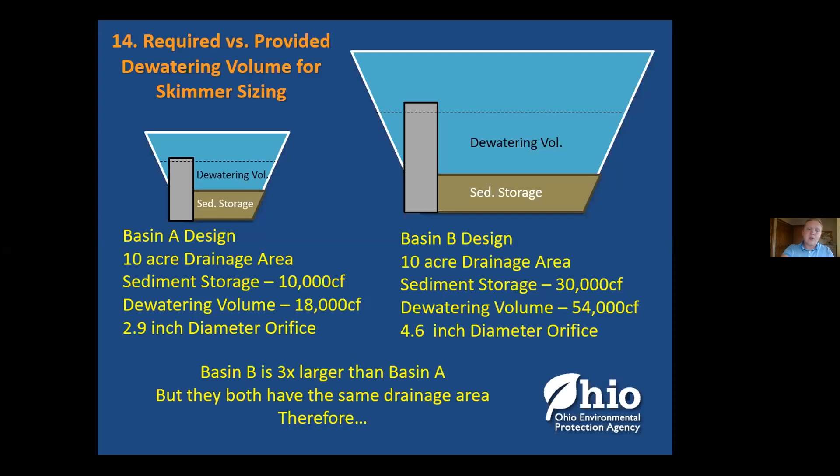In Ohio, the requirement is that you provide 1,800 cubic feet per acre of dewatering volume, and that correlates to 0.5 inches of runoff per acre. They're volumetrically equivalent. So for a 10-acre drainage area, as in the example, that would be 1,800 cubic feet times 10 acres, or 18,000 cubic feet of dewatering volume required for each of those basin designs.

And that happens to exactly equal the provided dewatering volume in Basin A. So in an event that would produce a half inch of runoff, it will fill the dewatering volume completely. And if you go through with the Faircloth skimmer sizing, you would come out with a 3-inch skimmer that has a 2.9-inch orifice plate, and that would result in that volume draining in exactly 2 days.

Now, the same event would only fill a third of the dewatering volume in Basin B, as it provides 54,000 cubic feet. And so if you mistakenly sized your skimmer based on the provided volume, at 54,000 cubic feet, you would think that you need a 5-inch skimmer with a 4.6-inch orifice plate.

And what will end up happening is that your dewatering volume will draw down in significantly less than 24 hours, which is going to result in a violation of the CGP. So you can see why proper sizing is so important.

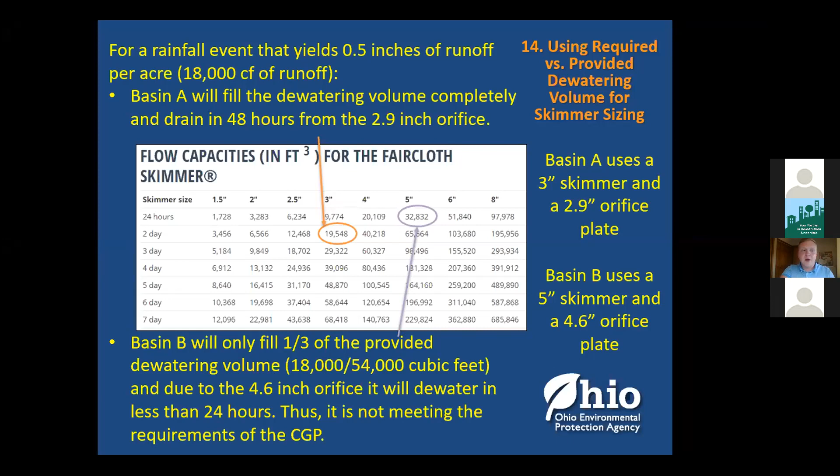Concrete washout areas themselves often pose a challenge in a SWPPP. What's important to note is that the concrete washout areas need to be lined with a watertight liner and properly marked with signage, because if on-site staff can't easily locate the washout area, they're probably not going to use it. Being watertight is important because the pH of that wash water can negatively impact nearby waterways, which is why the designated location matters. They need to be located away from catch basins, drains, or on-site or nearby waterways.

That leads me to the most common response we hear from designers, that they don't want to designate a specific area because perhaps the contractor knows a better, more convenient location. So they say the contractor will decide where the concrete washout area is going to be. But the location is important to protecting water quality, so it's better to designate a safe location or a couple of safe locations the contractor can choose from than to completely leave it up to the contractor. It helps reinforce good practices.

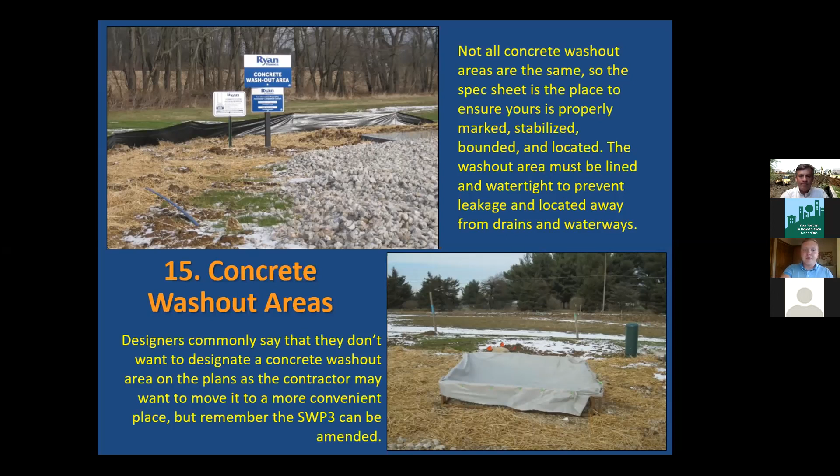And that kind of wraps up my portion of the presentation. Thank you very much for attending.